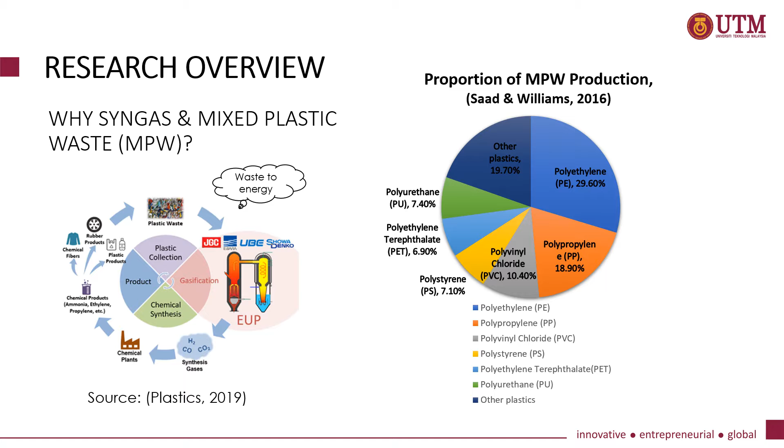Malaysia has been placed 8th among 10 countries that mismanage plastic waste, whereas globally we are facing a very low recycling rate, which falls at 9% out of 9 billion tons of plastic waste generated, thus making this research beneficial in reducing the amount of plastic waste in Malaysia as well as globally. Besides, insufficient current energy dealt by Petronas due to its financial crisis in processing crude oil, due to the low demand and supply affected by the COVID-19 pandemic, has shown a decline of 3% for the gas market compared to 2018, as said by Zahariah Liza, one of the Petronas board of directors.

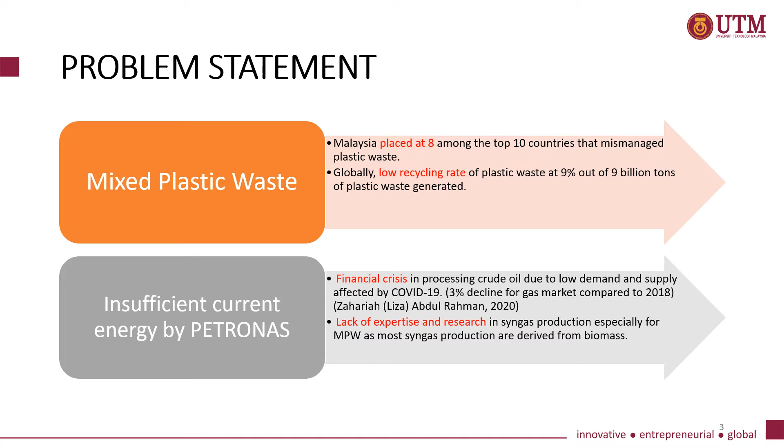On top of that, this research is conducted to fulfill the lack of research and expertise in syngas production, especially for mixed plastic waste, as most syngas which is readily available is derived from biomass.

Recently, members of Campus Sustainability from UTM posted a memorandum during the last Ramadan on avoiding any usage of single-use plastic bags. In June 2021, Petronas launched a new campaign called Net Zero 2050, which aims to safeguard the environment with green energy as well as creating continued value to the energy produced in sustaining our way of life, which is coherent to the research conducted. Syngas, a gas with low sulfur and carbon dioxide emission.

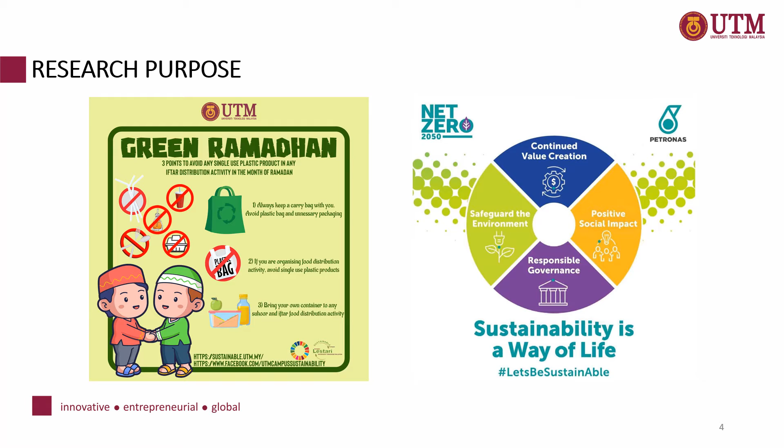Moving on to the first objective, which is to determine the weight degradation of commercial mixed plastic waste with increasing temperature via thermogravimetric analysis, TGA. There are 4 plastic samples tested: pure PE, pure PP, 75% PE and 25% PP, and 50% PE and 50% PP. All of these samples will be treated under conditions of 30 degrees Celsius up to 1000 degrees Celsius at 1 atm with nitrogen, which acts as a pyrolysis agent, supplied at the rate of 60 ml per minute.

Then the next objective is to evaluate the challenges in syngas production based on development of a kinetic model by critical review method. In this section, syngas production, effect of the blended ratio among PE and PP, as well as the kinetic model development will be evaluated via the critical review method. Last but not least is to suggest syngas production optimization at lab scale and industrial scale.

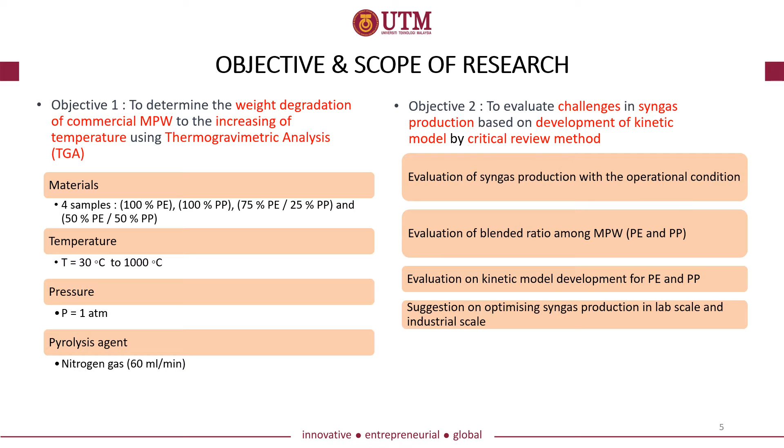This is the research flowchart, whereby the sample is prepared by grinding and sieving at a size of 1 to 2 mm. Then all samples, an average of 8 mg per sample, will be pyrolyzed inside the TGA at pyrolysis temperatures ranging from 30 degrees Celsius up to 1000 degrees Celsius with a heating rate of 20 degrees Celsius per minute and an input of 60 ml per minute of nitrogen in a platinum pan. The rate of carbon conversion among samples will be determined based on the data obtained from the TGA. Lastly is the process of critical review, whereby the evaluation of the effect of blended ratio, kinetic model development and suggestion on syngas production optimization.

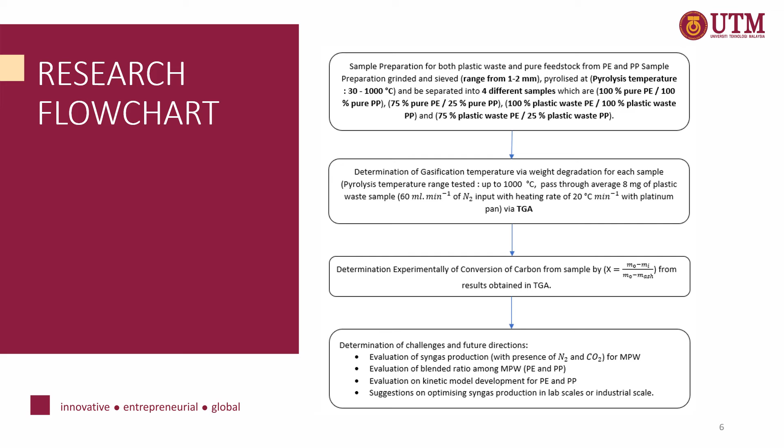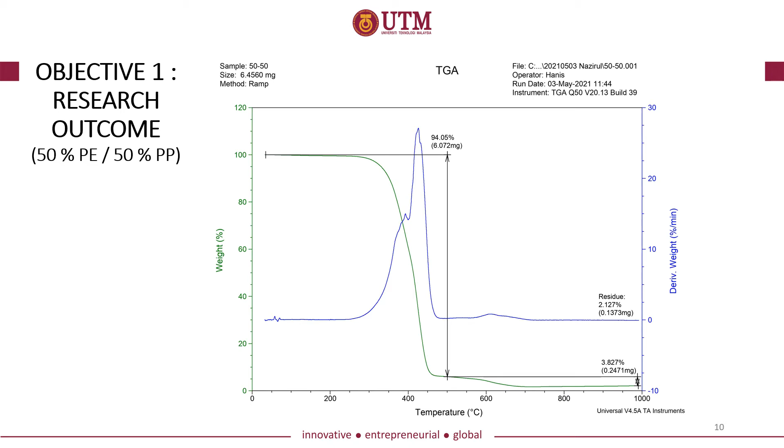For 75% PE and 25% PP by composition, it also showed much lower degradation compared to pure PE, which is at 89.94%. However, 50% PE and 50% PP shows an increasing trend from the previous composition, which falls at 94.05%, due to the decrease in the energy needed to break bonds compared to the previous sample.

To summarize, the graph on the right shows a compilation of TGA results for mixed plastic waste, which shows that all samples are fully decomposed around 500 degrees Celsius and fully degraded at about 650 degrees Celsius, whereby the 50-50 ratio shows the highest thermal degradation, followed by pure PE, then 75% PE and 25% PP, and the least is pure PP.

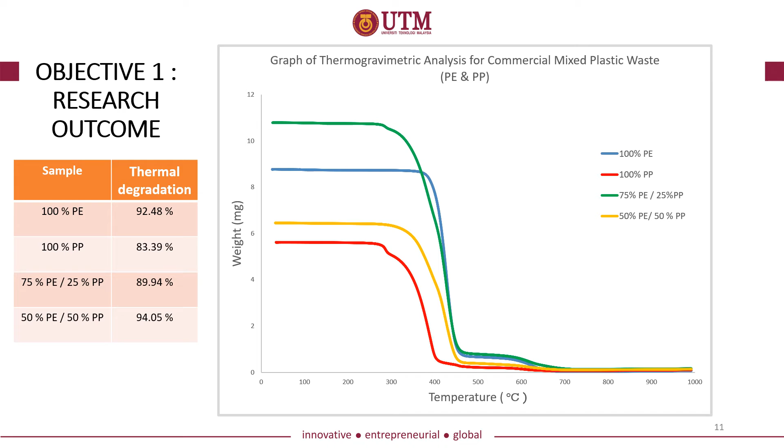After further analysis, the data concluded that pure PE has the highest rate of material weight change upon heating, at 57.64 weight per minute at 428.44 degrees Celsius. By averaging all samples, the optimum temperature for syngas production from PE and PP lies between 420 and 430 degrees Celsius, with any composition that favors PE.

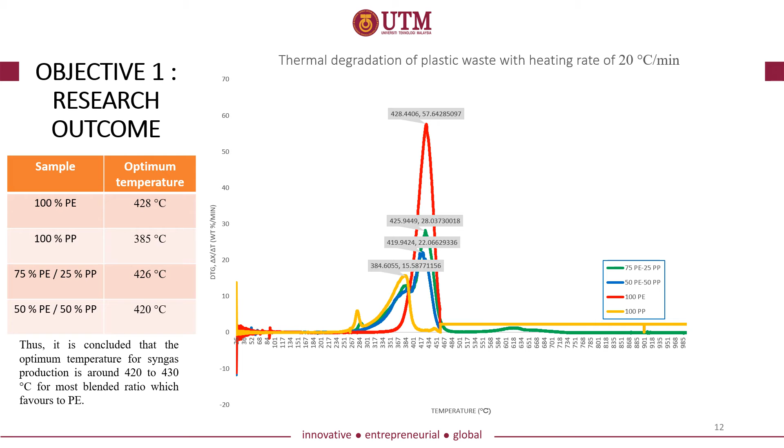Let's move on to the next objective, which is to evaluate the challenges in syngas production from mixed plastic waste. All organic waste is suitable feedstock for syngas production due to its high purity of carbon C1 and hydrogen components, which are the main components of syngas. The flexibility of syngas in producing other value-added products has been insufficiently exploited due to its complexity, which creates challenges in transforming the feedstock into syngas by conventional procedures.

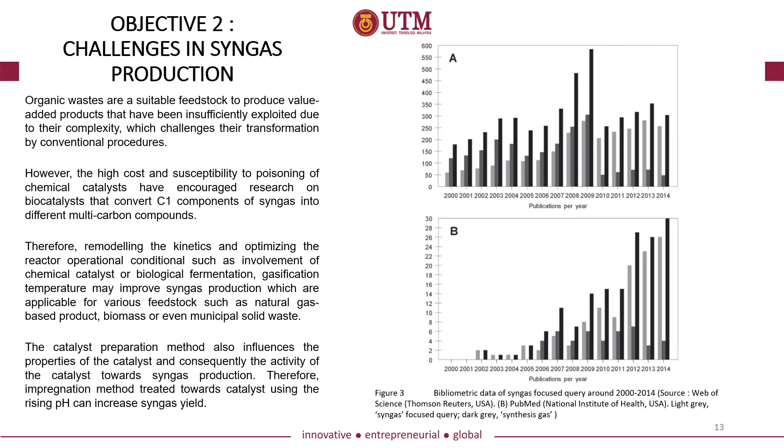Therefore, I personally suggest remodeling the kinetics and optimizing the reactor operational conditions, such as the involvement of biological fermentation, chemical catalysts, or gasification temperature, in boosting syngas production, applicable to natural gas products, biomass, or even municipal solid waste. In reviewing this research, the catalyst preparation method will also influence the properties of the catalyst, which will impact its activity. As a suggestion, an impregnation method applied to the catalyst using rising pH will also improve the syngas yield.

Besides, this section evaluates objective 2, which is the effect of the blend ratio of PE and PP. The diagram on the right is a base reference for gasification, where the data obtained from the TGA conducted experimentally during pyrolysis is coherent with the data analyzed. The reason is that PE has a longer hydrocarbon chain compared to PP, thus more carbon is available to convert during gasification when treated with carbon dioxide to form carbon monoxide, which is a component of syngas.

Addition of other products such as wood pellets and pet coke may also increase syngas yield due to their heavier and simpler elemental composition, compared to other available products which may have contaminants that impact the efficiency of syngas production. Addition of these two products results in a higher rate of reaction, as well as increasing the optimum temperature required during gasification compared to mixed plastic waste, in return for a higher cost of operation in producing syngas.

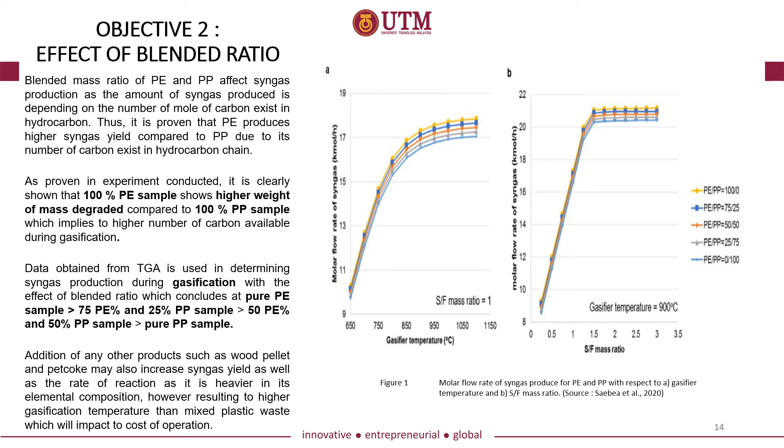For the kinetics of PE and PP, the TGA data showed that PP starts to melt and decompose faster, at roughly 250 degrees Celsius, whereas PE at 350 degrees Celsius. Most samples are fully decomposed at the same temperature, around 500 degrees Celsius, and carbon black is formed above 600 degrees Celsius. This proves that gasification of raw mixed plastic waste is best conducted at a temperature ranging from 420 to 430 degrees Celsius to maximize syngas production, specifically for PE and PP.

Lastly, the conversion rate of samples to carbon can be evaluated based on the TGA data by plotting carbon conversion rate against inverse temperature. It is believed that adding carbon dioxide instead of just water or steam during gasification may improve syngas yield. By referring to the Boudouard reaction, carbon dioxide will react with carbon in the sample itself to produce carbon monoxide.

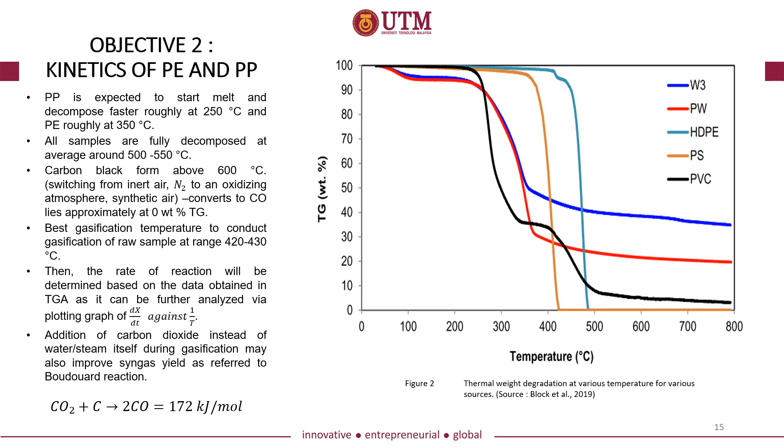Lastly is syngas production optimization during kinetic model development. The coefficient of determination, along with the activation energy, can be used to determine the correlation of the kinetic model to the experimental data. Plotting an Arrhenius plot, a graph of ln K against inverse temperature, is useful in determining the best kinetic model by fitting the activation energy based on the TGA results. From the results, samples with the lowest activation energy reflect the highest conversion of carbon to carbon monoxide and can be used as the best syngas model.

This research has concluded that the addition of nickel and cobalt in a bimetallic catalyst supported over alumina shows improved properties for carbon monoxide hydrogenation, resulting in an increase of the syngas yield.